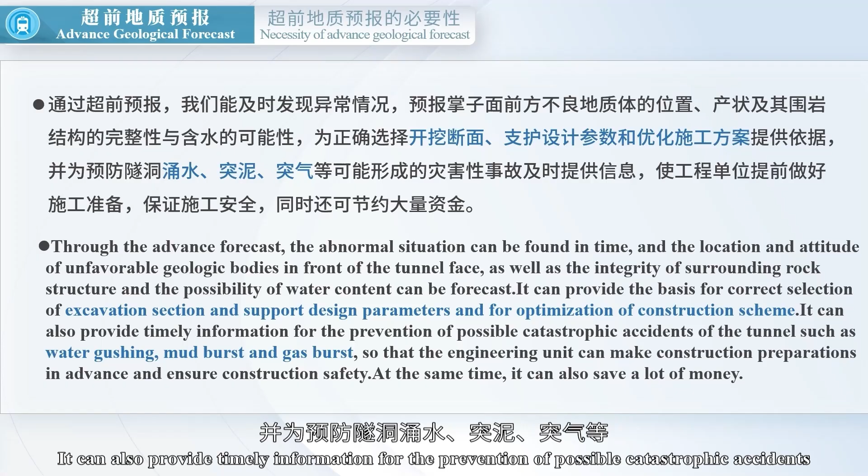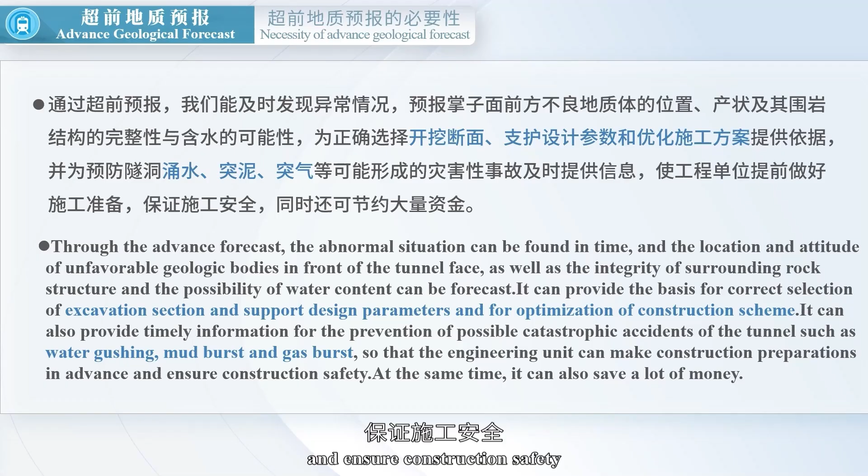It can also provide timely information for the prevention of possible catastrophic accidents of the tunnel such as water gushing, mud burst and gas burst, so that the engineering unit can make construction preparations in advance and ensure construction safety. At the same time, it can also save a lot of money. Therefore, the Tunnel Advance Forecast has great social and economic benefits for safe and scientific construction, accident loss avoidance and investment saving.

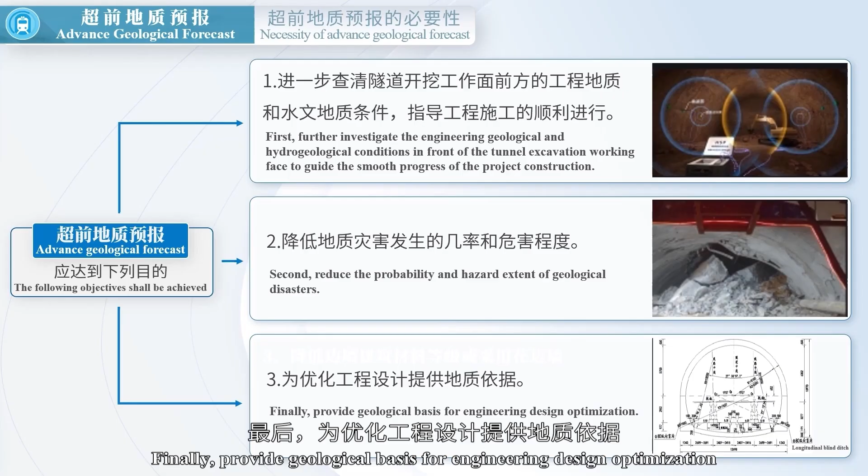Advanced Geological Forecast: the following objectives shall be achieved. First, further investigate the engineering geological and hydrogeological conditions in front of the tunnel excavation working face, to guide the smooth progress of the project construction. Second, reduce the probability and hazard extent of geological disasters. Finally, provide geological basis for engineering design optimization.

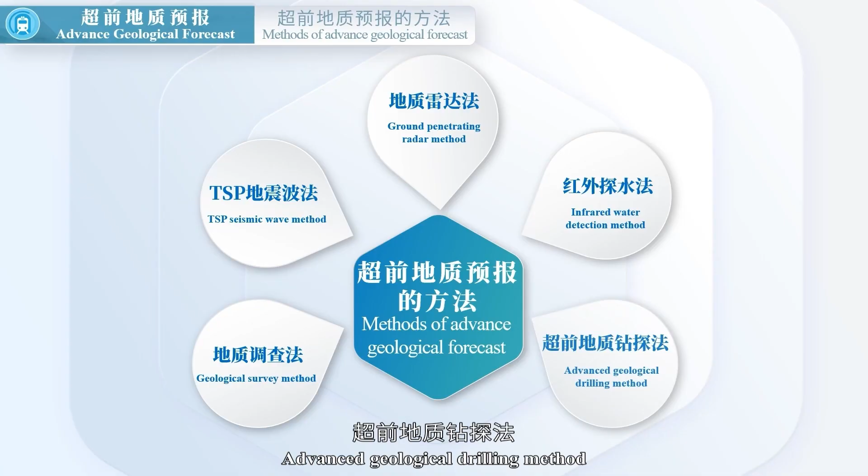So how do we carry out the Advanced Geological Forecast? There are 5 commonly used methods for Advanced Geological Forecast: Geological Survey Method, TSP Seismic Wave Method, Ground Penetrating Radar Method, Infrared Water Detection Method, Advanced Geological Drilling Method. Let's start with the first method.

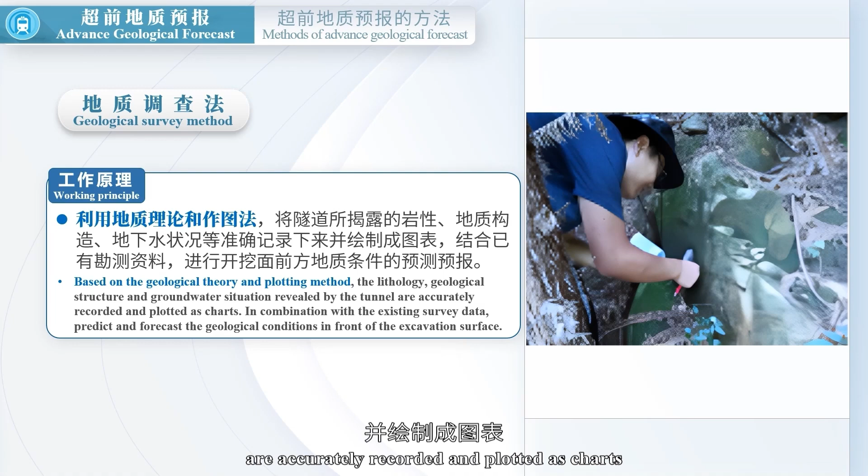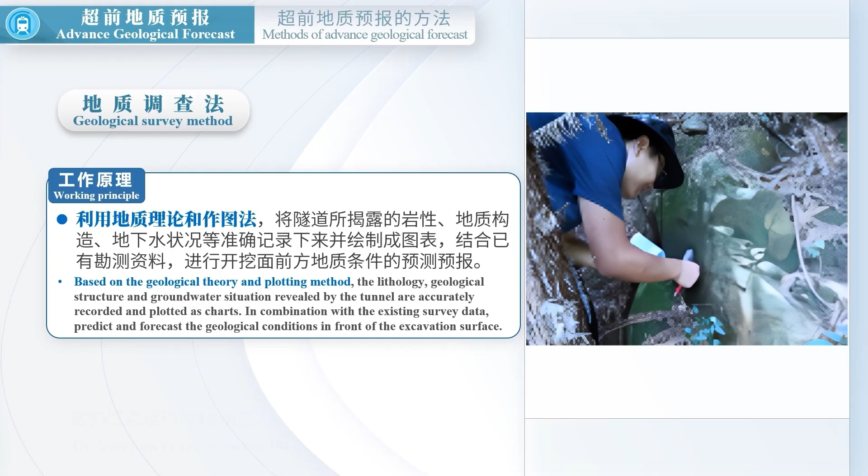Geological Survey Method. Its working principle is based on the geological theory and plotting method. The lithology, geological structure, and groundwater situation revealed by the tunnel are accurately recorded and plotted as charts. In combination with the existing survey data, predict and forecast the geological conditions in front of the excavation surface. Its detection range is within 10 m.

Its advantages are solid theoretical basis, simple equipment, and convenient operation. No or little tunnel construction time is occupied, timely submission of materials, and low cost. Disadvantages: it requires a higher level of geological knowledge for operators. It is required to be completed by geological professionals. Especially in tunnels with extremely complex stratum lithology changes, the accuracy of forecast is more limited.

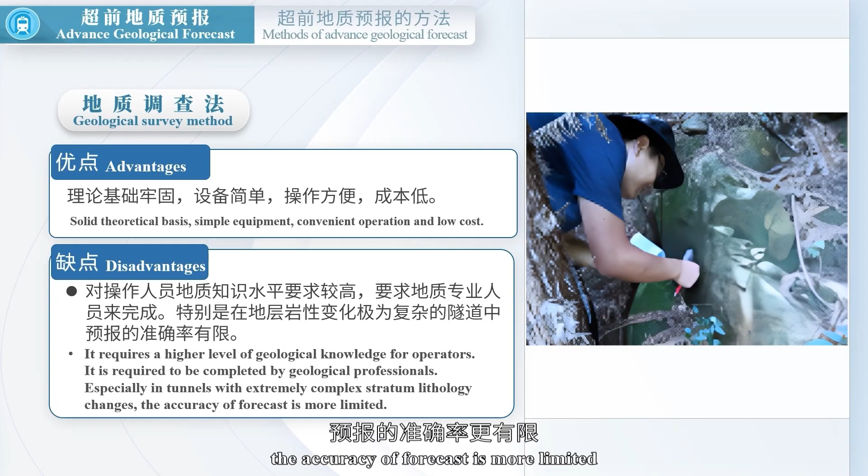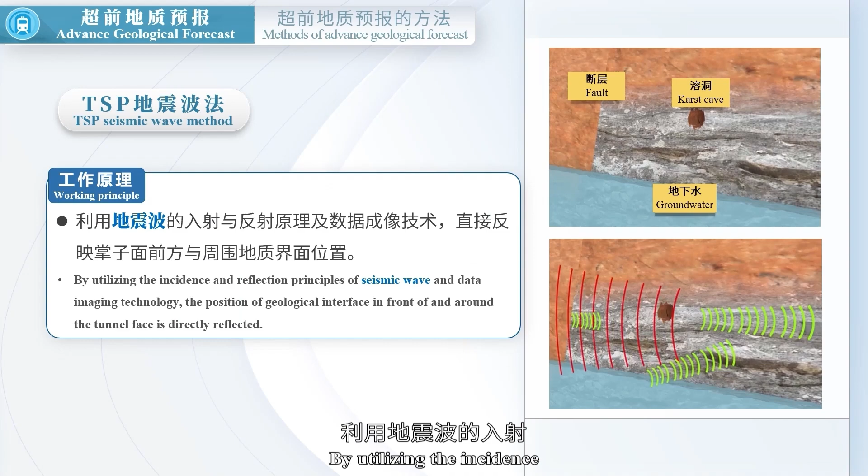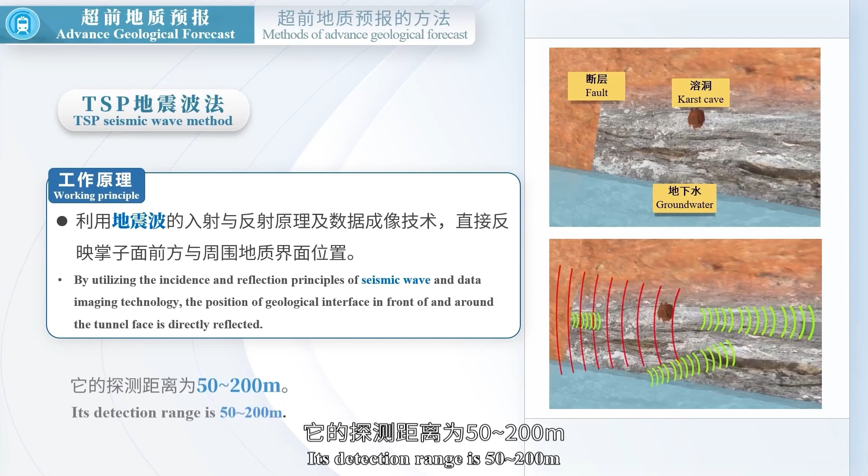What we see now is the TSP Seismic Wave Method. The working principle of TSP Seismic Wave Method is, by utilizing the incidence and reflection principles of seismic wave and data imaging technology, the position of geological interface in front of and around the tunnel face is directly reflected. Its detection range is 50 to 200 m.

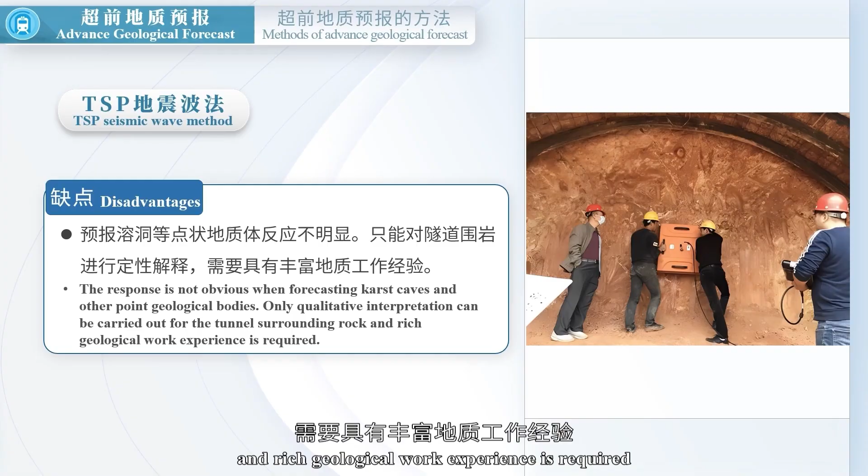Its advantages are: the reflected signals forecasting fault and other planar structures are obvious. The detection results of the TSP can forecast whether there is groundwater, whether it is a weak water-rich zone or a strong water-rich zone, and other relative conclusions. Disadvantages: the response is not obvious when forecasting karst caves and other point geological bodies. Only qualitative interpretation can be carried out for the tunnel surrounding rock, and rich geological work experience is required.

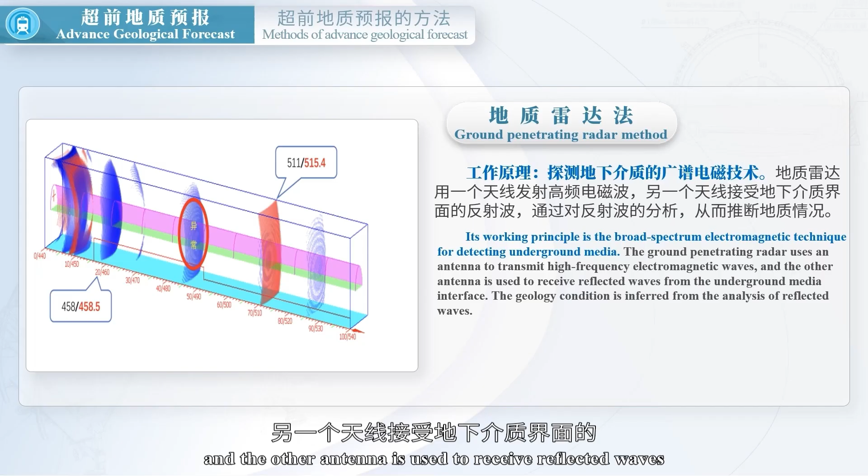What we see now is the ground penetrating radar method. Its working principle is the broad-spectrum electromagnetic technique for detecting underground media. The ground penetrating radar uses an antenna to transmit high-frequency electromagnetic waves, and the other antenna is used to receive reflected waves from the underground media interface. The geology condition is inferred from the analysis of reflected waves. The detection range is 10 to 25 m.

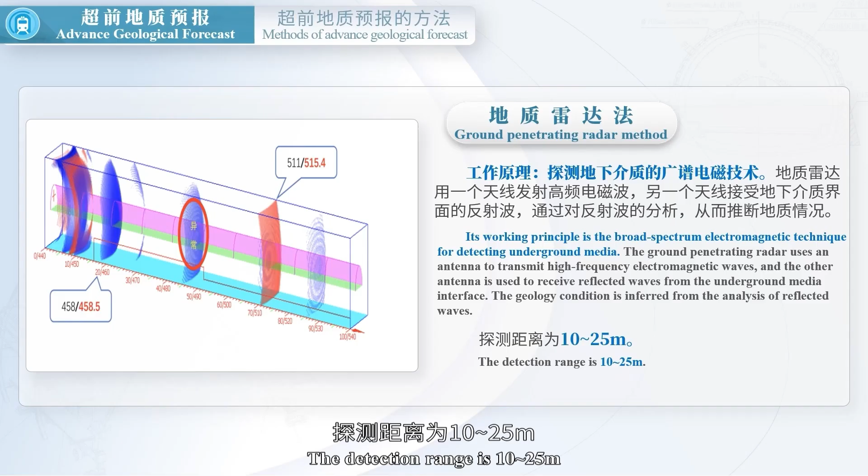It has the advantages of strong adaptability to the tunnel construction environment and little interference to the construction. The accuracy degree is relatively high. For the detection of unfavorable geological bodies such as rock caves and rich water areas close to the tunnel face, the ground-penetrating radar has its own unique features.

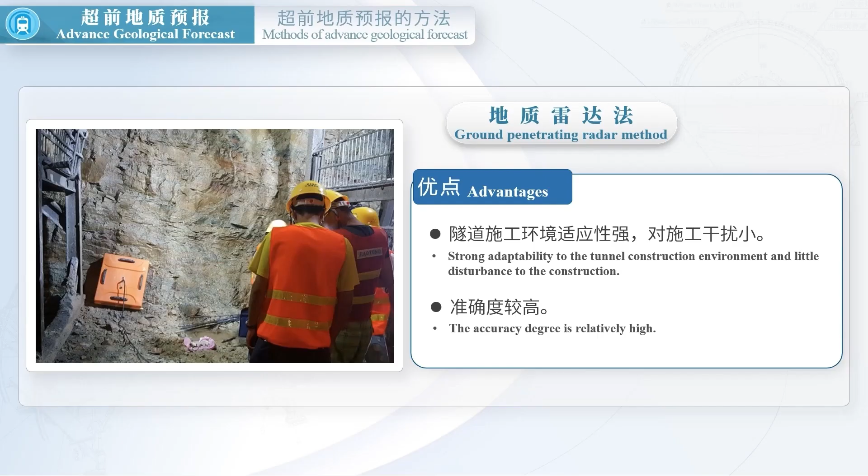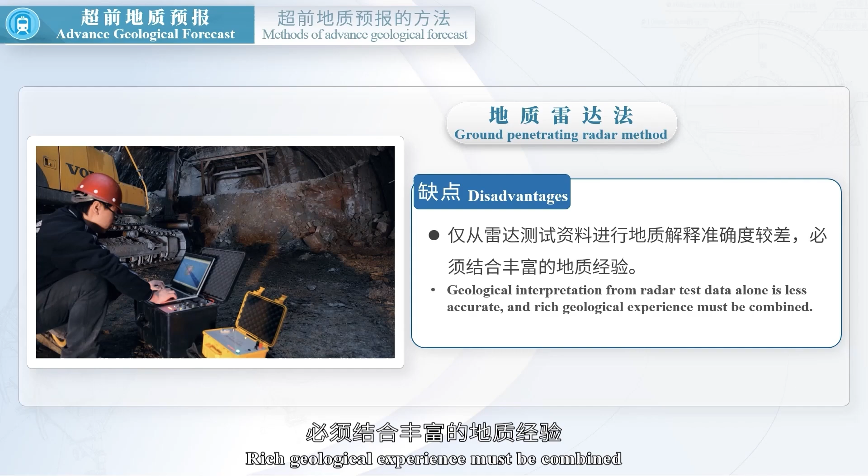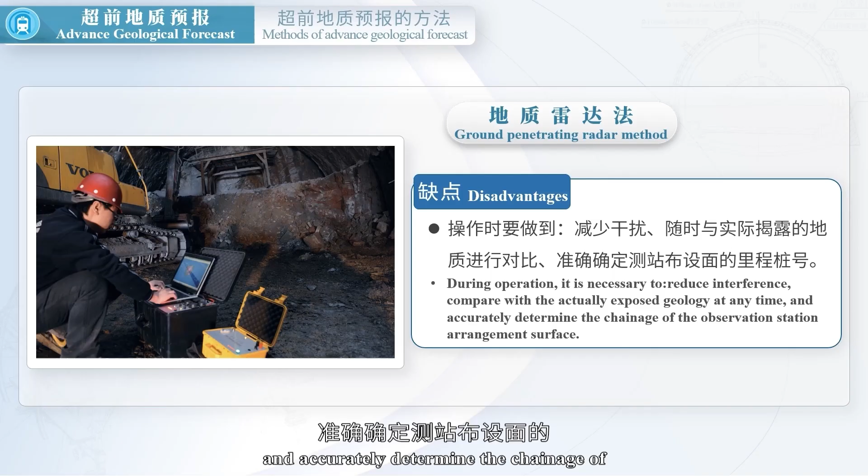Its disadvantage is that the geological interpretation is only based on radar test data, so the accuracy degree is relatively poor. Rich geological experience must be combined. During operation, it is necessary to reduce interference, compare with the actually exposed geology at any time, and accurately determine the chainage of the observation station arrangement surface.

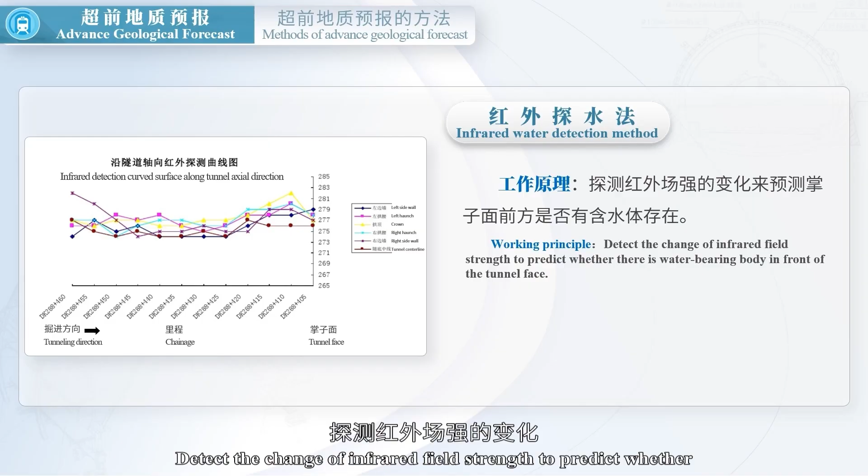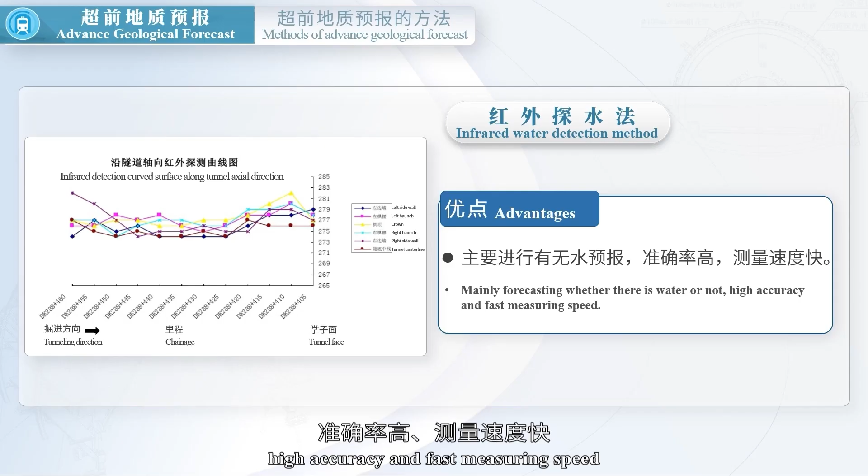What we see below is the curve graph of infrared water detection method. Its working principle is: detect the change of infrared field strength to predict whether there is water-bearing body in front of the tunnel face. The detection range is 10 to 30 m. Its advantages: mainly forecasting whether there is water or not, high accuracy and fast measuring speed. Disadvantages: quantitative water measurement is impossible, and only approximate distance can be reflected.

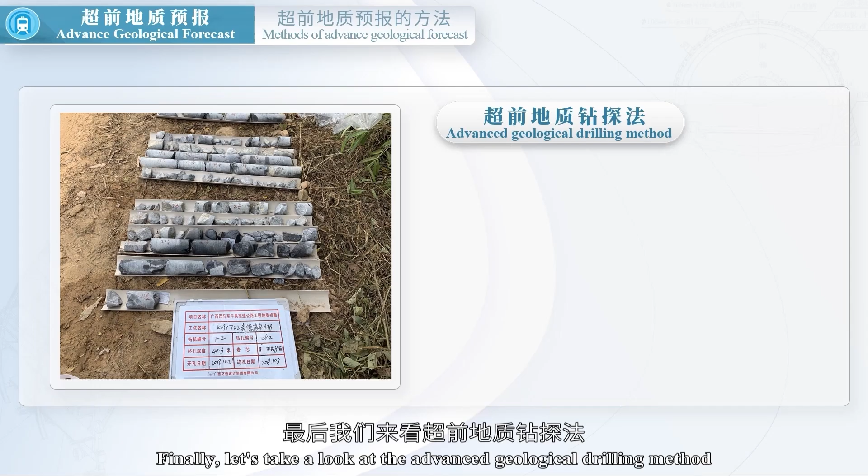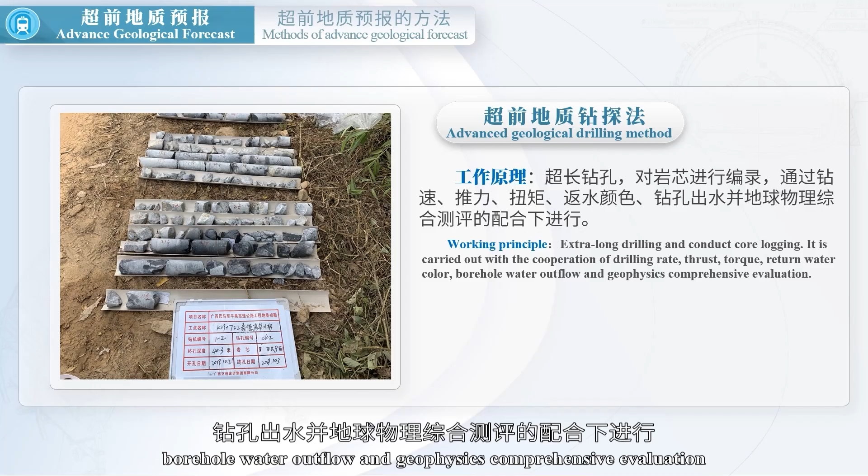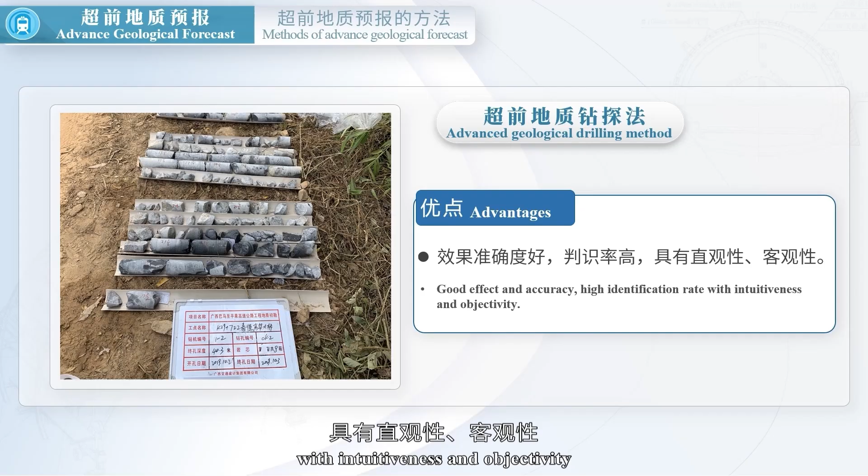Finally, let's take a look at the advanced geological drilling method. Its working principle is extra-long drilling and conduct core logging. It is carried out with the cooperation of drilling rate, thrust, torque, return water color, borehole water outflow, and geophysics comprehensive evaluation. The detection range is 5 to 80 m. Its advantages are good effect and accuracy, high identification rate with intuitiveness and objectivity. Disadvantages: high cost, plenty of tunnel construction time is occupied, and only one hole cannot represent all situations.

Advanced geological forecast is very important to the tunnel construction and operation safety. In view of the geology complexity of karst tunnel engineering, all parties need to provide sufficient professional geological personnel to participate in the whole tunnel construction process and strengthen the advanced geological forecast.

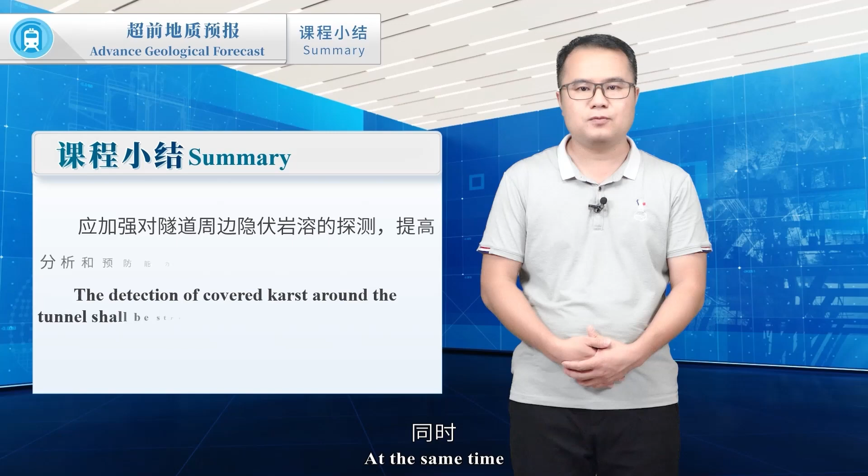At the same time, the detection of covered karst around the tunnel shall be strengthened to improve the analysis and prevention ability. Geological personnel shall conduct excavation at any time, observe the change of geological conditions at any time, conduct detection and comprehensive study and judgment at any time, and make design adjustments in time to ensure the smooth completion of project safety.